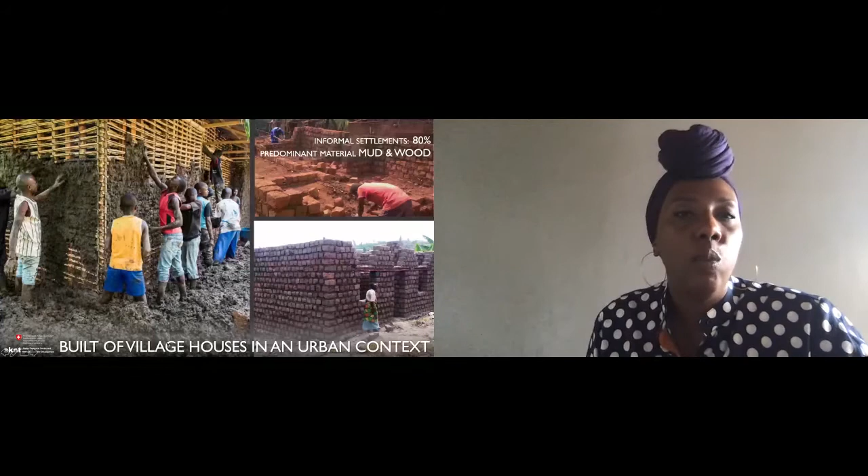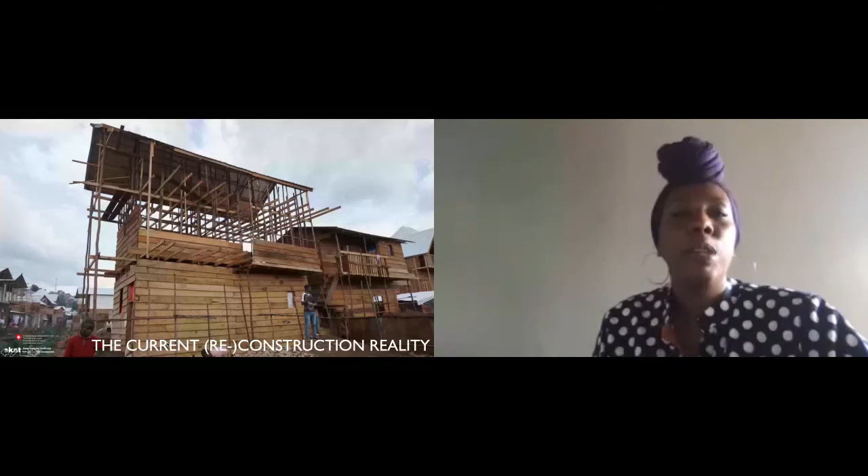And of course, there are always disasters, and especially now that the climate has changed, rainstorms are a lot more frequent, so there are storm damages to the houses, landslides, incredibly dangerous. In places like Bukavu, where they build primarily of wood, there are many frequent low-intensity disasters, several fires per year that wipe out hundreds of houses within minutes, and then people rebuild in the same areas. And this is the current reconstruction reality. So in many cases it's preferable to build preparing for the next disaster, not investing too much, because you know inevitably you have to replace the housing stock.

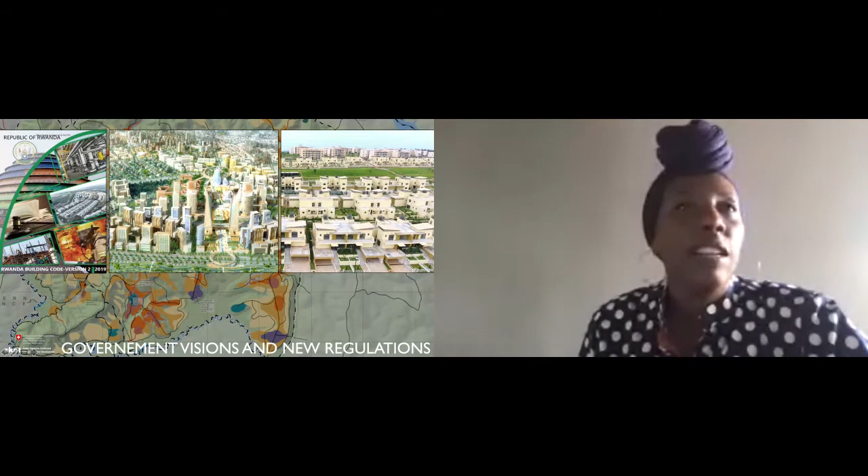And so what are the challenges that come with that? We now have this desire for vertical growth in African cities, especially here in Rwanda, where the government has gone to enormous lengths to publish proper building codes. There are upgrading codes, land use plans, a new master plan for Kigali, all of these new regulations so that the country, which will hopefully soon be a middle income country, can have housing and building stock that is fit for this type of activity. And housing and the median income are tightly related, because housing should be a major growth and employment factor within a developing country.

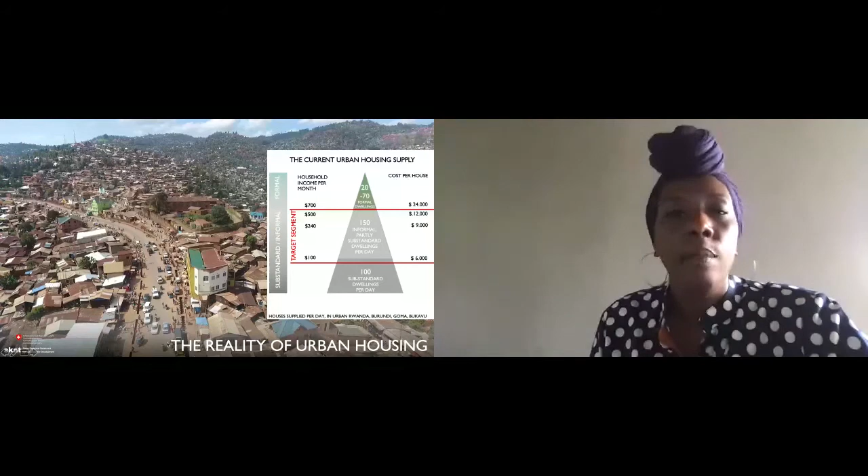Unfortunately, even though there are those ambitious master plans, the reality of urban housing is actually quite different. Currently, the formal housing supply is only at the top of the income pyramid. Everything at the bottom is either substandard or informal housing, and there are hundreds being built every day in the region using the materials that are locally available. The problem is that for urban buildings, there's a lack of skills. And so contractors struggle with building multi-story buildings. And this is an example of something that you see in Bukavu.

And then, of course, that creates extreme vulnerability in these places that are already sensitive, and for these populations that are already searching and needing proper housing solutions.

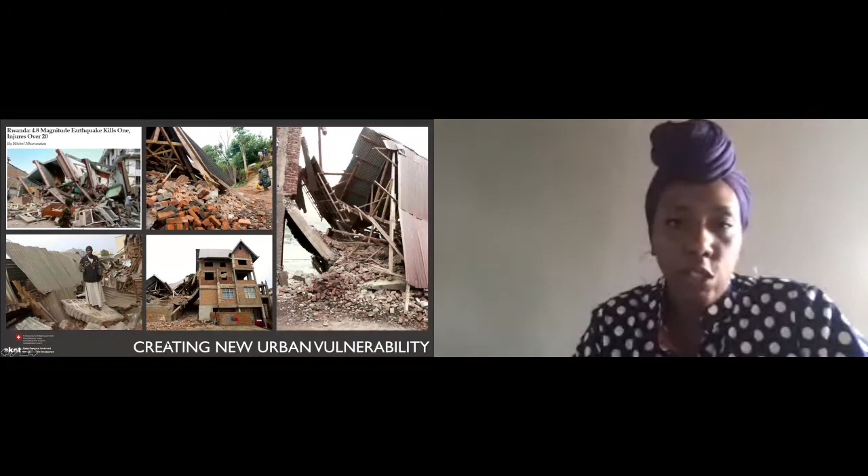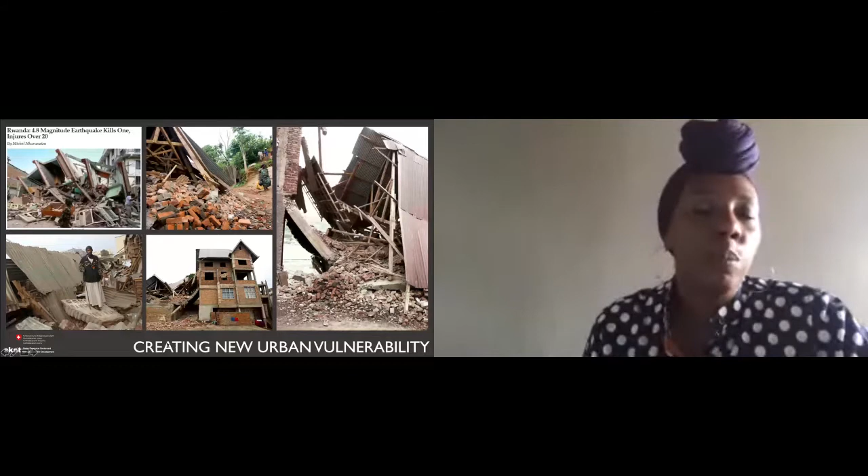On top of it, this growth in the cities is requiring more building materials. There are few local strong value chains here in the region, and so people mostly go outside searching for cement. And cement comes from some here in the country, in Rwanda, but mostly from our neighbors in Tanzania, in Kenya, Uganda. So all of that capital is actually going to the neighbors rather than staying here and actually nourishing and feeding what should be a strong construction industry, considering that the demand is so high.

In the region, in 2015 alone, there was $100 million that were sent outside of the country, which is equivalent to about 50,000 workers' income that could have been here if there had been other solutions for being able to build. And right now there are few.

And so what happens, of course, is that then we fall back on the traditional building material production that has been popular here for 50, 60 years, which is bricks, fired bricks. And those bricks require firewood, which, although in Rwanda it is completely illegal to use firewood for firing bricks, it is used because the need for building materials is so incredibly high.

So you end up in a situation where it's already an area where deforestation is a problem, and once the need for these bricks gets so high, and it is incredibly high right now post-COVID, the impact on the environment is felt on many levels. So at deforestation, but also when we talk about emissions and CO2 emissions.

So the objective of our project, which is called PROECCO, Promoting Off-Farm Employment Through the Production of Climate Responsive Building Materials, is to reduce the urbanization's climate impact. And it's also at the same time to tap into the unused employment potential. And you can do this, of course, by making safe urban housing affordable and available at mass scale.

This project has been around since 2012. It is a project of the Swiss Agency for Development and Cooperation. They have a long-standing collaboration with the Rwandan government and the Burundian government in the Great Lakes region. They've been here since the 60s. And so the commitment to being able to help build larger cities that can really help the community thrive is something that the Swiss Agency for Development and Cooperation has been committed to for quite some time.

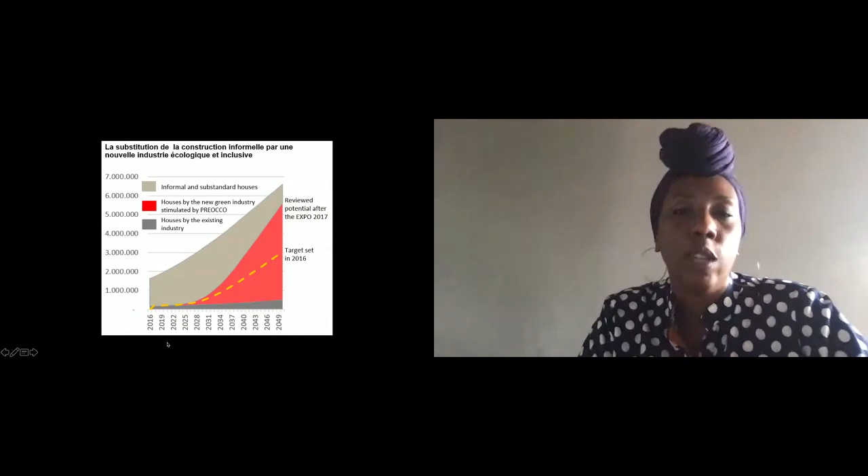And so if you actually start to look at the housing curve and to really understand what this potential is, you can see really that the need for housing is immense. The market share of informal and substandard housing is quite large. And so really the idea is to come and find solutions that can actually provide affordable housing to people and switch from informal to formal solutions. And we imagine that you could have at least 40% market share by producing locally sourced building materials, most specifically brick.

Now, what does that mean in terms of a real challenge by 2050, just so we understand the volumes that we're talking about and the type of solutions that we need to plan for? What it means is that you would need about 5 million proper formal urban dwellings by 2050. It would also mean that by not doing this, we could potentially lose 300,000 employments that are gone to the cement industry, which again is mostly outside of the country. So what can we do to figure out how to keep those employments here in the country?

And if we look at what it does to our environment, 100 million trees are unnecessarily cut by producing these substandard brick products that I showed earlier. And so the impact of that is about 40 million tons of CO2 that are unnecessarily emitted. If we could find a proper local solution, you could begin then to reduce the emissions, create employment, and then of course generate the dwellings that you actually need to meet the demand.

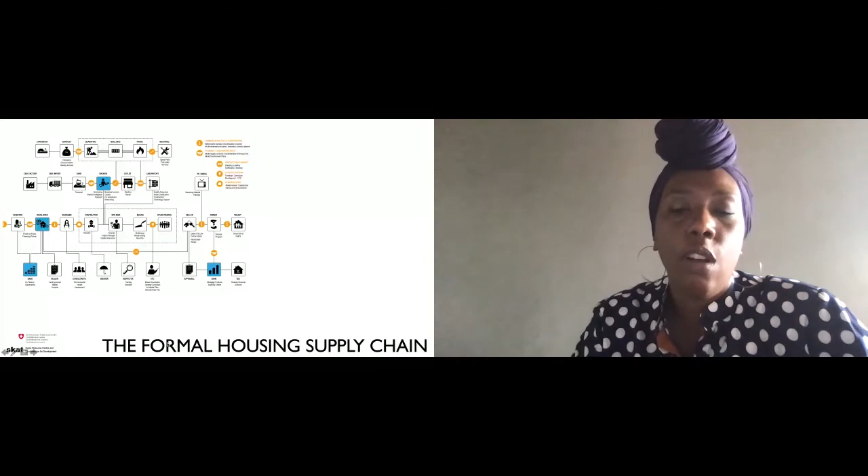And so our job is not to replace any of these actors, but to capacitate them, to allow them to perform at the level that they need to be able to deliver all of the housing that is required. Basically, we can then break the housing chain into different groups. So at one area, we come up with solutions that are aimed at figuring out better concept design and engineering, also supporting housing finance. The project also looks at construction solutions, inside client business, trade and quality certification, and building material production. So again, we're everywhere along the value chain.

Everywhere you see an orange dot, that's where we play the intermediary to try and create win-win solutions between different partners along the value chain, all with the idea to be able to build this so that it is strong and that it could allow the number of houses that we need to be created across the region. And so what does that look like?

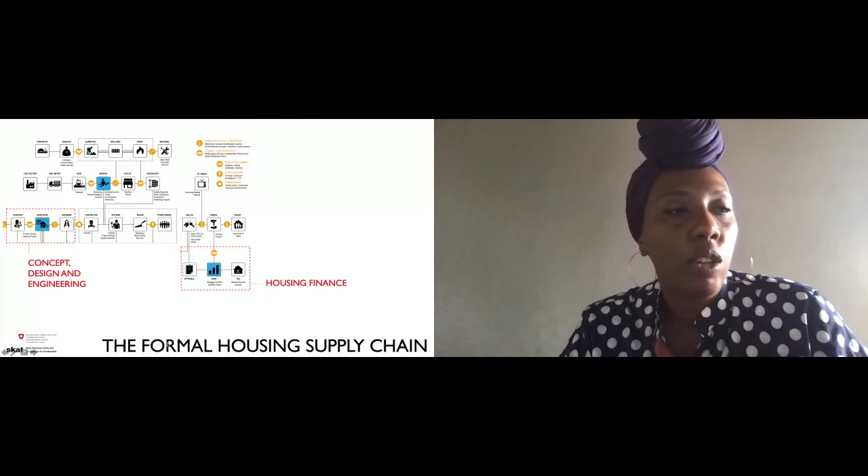So from the concept design and engineering perspective, that can be owner-driven settlement upgrading methods that draw from some of the legal documents that are already in place, especially here in Rwanda, affordable and green urban housing typologies, pre-engineered construction design solutions that can be available for people to be able to take those documents and actually be able to build with them. We also offer easy to build storied walls and slab solutions that are, again, available for the public, trainings for contractors and masons, quality management and inspection methods, all with the aim of course, reinforcing the strength of the construction sector.

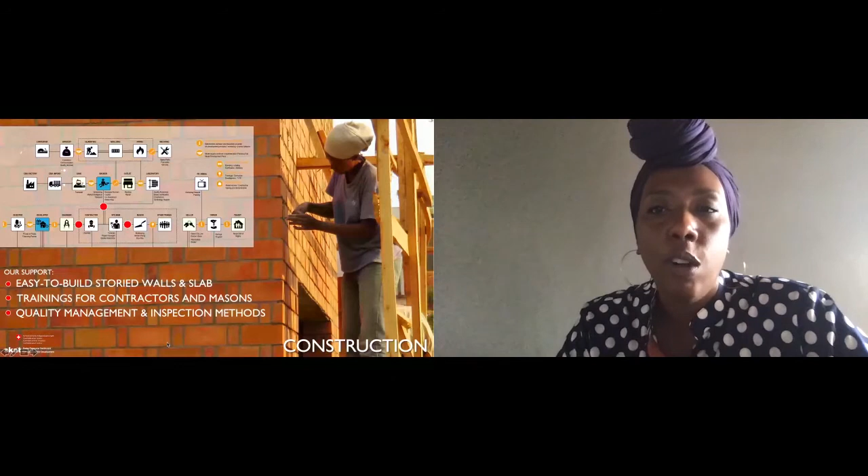Similarly, now the project offers low carbon technologies for load-bearing brick walls, machine designs for products that require less cement, and the coaching of brick makers and other building material suppliers along the value chain.

With that in mind, to give you an example of some of the tools, there are owner-driven settlement upgrading tools. We have on the left, as you can see, some cartoons, some typical plans of how you can begin to transform entire neighborhoods, and all these documents are available for local communities, for authorities, for investors, bankers, etc. We offer modular and customizable building systems that really allow us to create affordable housing that can be duplicated and customized according to people's needs, according to their budget, and of course, according to their preferences.

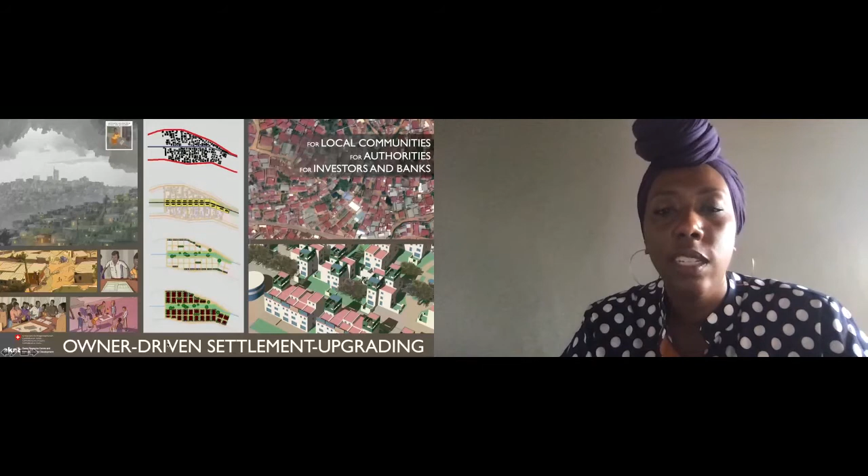Easy to build walling systems, as I mentioned, pre-engineered designs, and then of course, tools that allow local authorities, civil engineers, building inspectors, everybody to be able to use and learn how to use these technologies and apply them again at a larger scale. We have calculators and costs and climate performance calculators that allow you to see the different types of construction system and what would be the environmental benefits of each one.

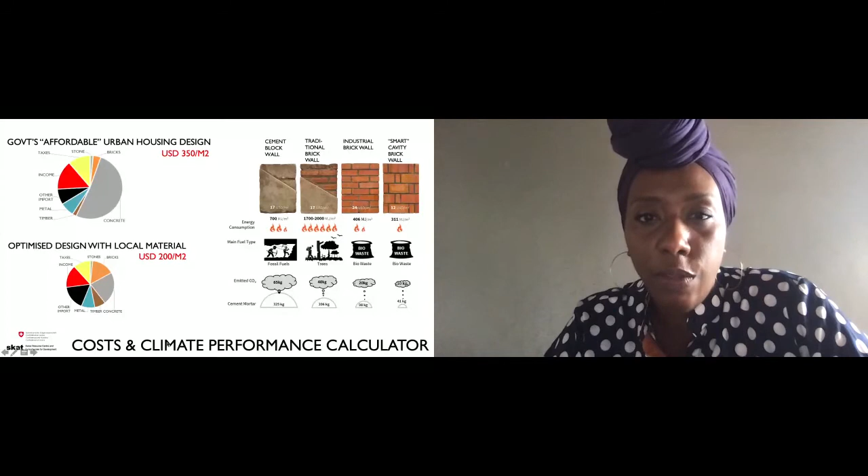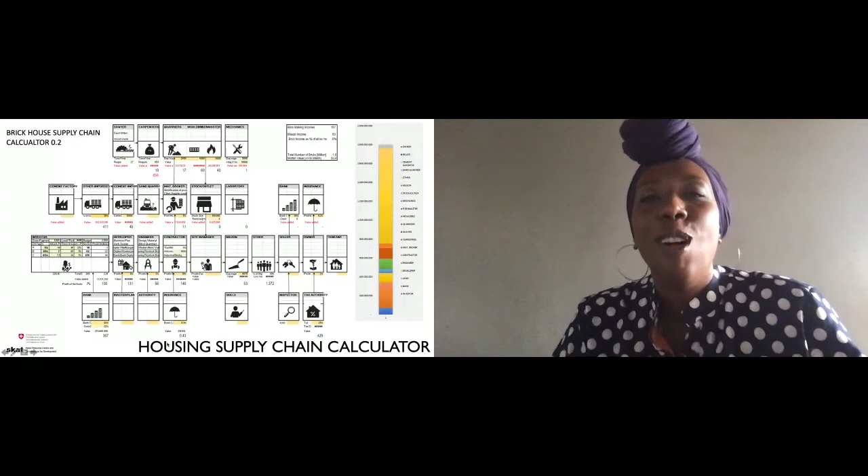Housing supply chain calculators to be able, again, to calculate what do you need in terms of how many engineers, how many architects, how many laboratories to test bricks, all of that to be able to build up the supply chain to deliver the housing. So given all of that, the project has been working on building that up for the past 7 years.

And what has been really exciting for us is that we've had the opportunity to do a proof of concept, to test it out, to see how it is working, what the reception is, and to fine tune all those tools so that when the project closes, they can be transferred to the private sector. And so we did this at 3 scales, and those are what I will describe to you today. The first scale is the scale of the house.

So what we did was to start looking again at this value chain to zoom in on really the construction aspect. And how could we come up with something, given the limited purchasing power, a module or a type of housing that was cost effective, that was customizable, and easy to build and replicable? And so in 2017, we introduced what we called the 8 million franc house, which at the time was a little less than $10,000. And so that includes everything, including taxes, contractor profit, everything except for the land.

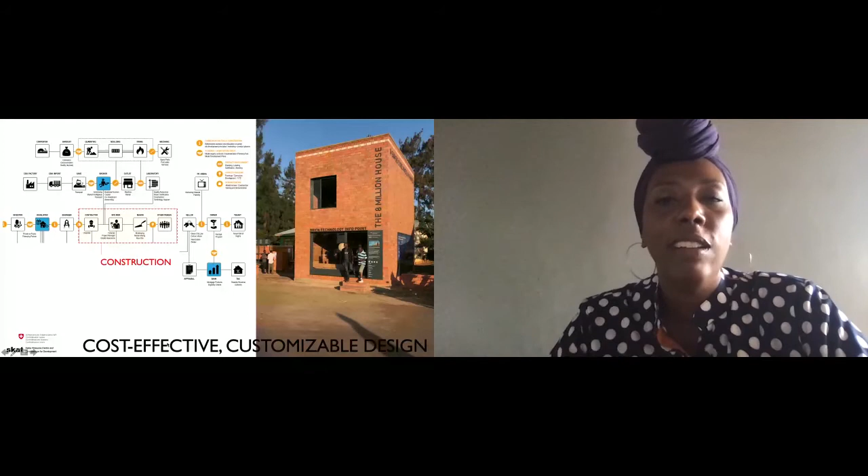And the idea was to show that you could build something with entirely local materials and really be able to achieve the cost savings that we need in order for the population to be able to access these houses.

So with the usual construction cost, we're about at $350 minimum per square meter here. With the way that we've chosen to build, with what we call a cost optimized design, and I will show you some of the features afterwards, we reduce the amount of cement mortar that is required by using a different technology, and that allows us really to shift to a design that is much more locally focused.

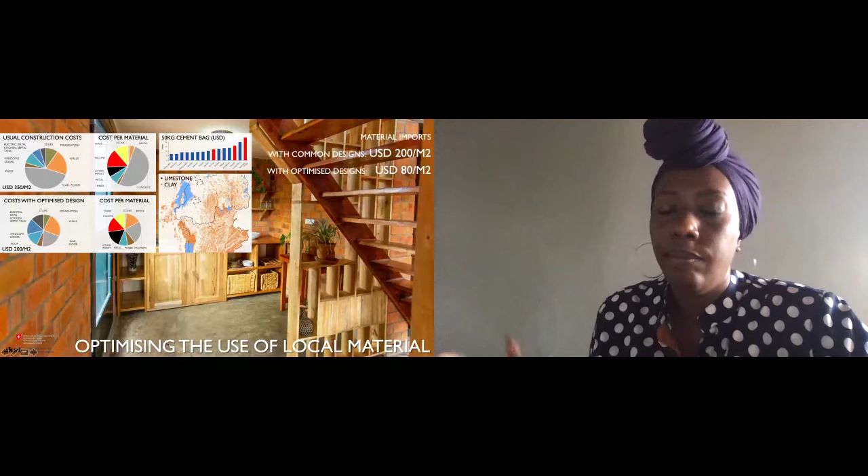So with a common design, you have about $200, which is actually material imports from outside. With this optimum design, you have about $80 of the cost per square meter that goes to the construction of the house. Now, in addition to the local materials, the other thing is the rowlock bond.

And so what we did was really look at what you can actually do with a typical brick. And we decided to reinvent or give a new life to something called the rowlock bond, which is a cavity wall technology. And this cavity wall is not something that we've invented. It's been around since the Industrial Revolution, but it's actually something that allows you to reinforce the wall so the wall becomes load bearing. So no longer do you have column and beam structures.

You actually have a wall that carries the loads from the roof all the way down to the foundation. And that means that everything inside can then become entirely flexible. And so it can be in that way incremental, that people can begin to put in walls and partitions as long as they have the finances to do so.

And this technology has actually been adopted and promoted very heavily in Kathmandu after the last earthquake, because that reinforcing of the wall allows it to perform quite well during seismic events. And so even this little first cube that we built, you can see all the reinforcement that's actually inside the building. You don't see columns, you don't see beams. What you see are these, what we call strengtheners, both horizontal and vertical, that allow the building to stay together and protect it in the case of an earthquake.

So in addition to that, using those technologies, you see that we're able to drive the walling cost down from $18 per square meter roughly to about $12 per square meter by, again, reducing the amount of cement mortar, coming with a better environmentally friendly improved brick product, which also creates more employment. So 2.5 person days per square meter as opposed to 1.5 person days, and also consumes much less energy because it is fired with bio waste and not the firewood that is technically banned.

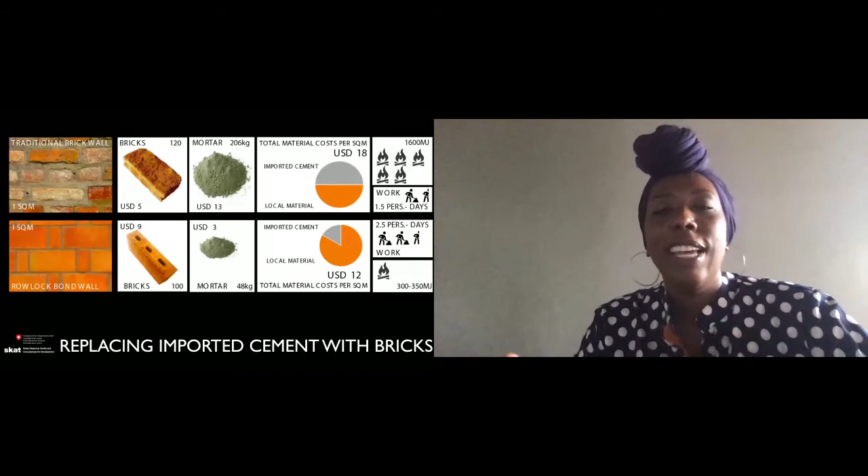So we started with the small one unit and then built an 8-in-1 unit in an informal settlement as a demonstration. And it is fully occupied, renters, tenants, as well as landowners live in this unit, and it's able to meet all the requirements of the master plan, as well as be there at the cost that was required.

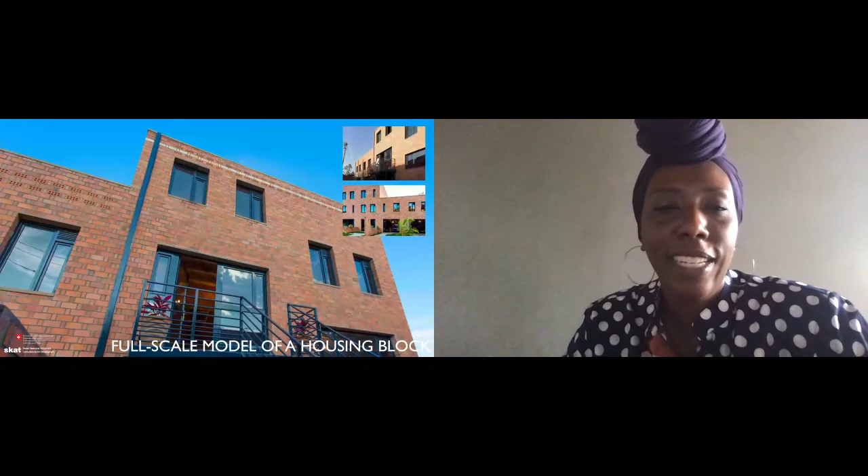Since we built that building in 2018, it has been duplicated across the region. In Rwanda, it's already been copied with this technology, different versions of it. There are about 1,500 copycat dwellings since 2018. The last time I saw you last year, it was about half that amount. So they continue to propagate all over the region, which is really quite exciting.

The issue is, of course, that now the building material demand becomes higher. So we've managed to generate jobs in construction and jobs in producing bricks, but the industry, of course, needs more. If we go back to the figures that I mentioned at the beginning, 5 million houses are going to be needed by 2050. There really needs to be a manufacturing engine to supply all of these bricks for all of these houses. And that really is also part and parcel of our job.

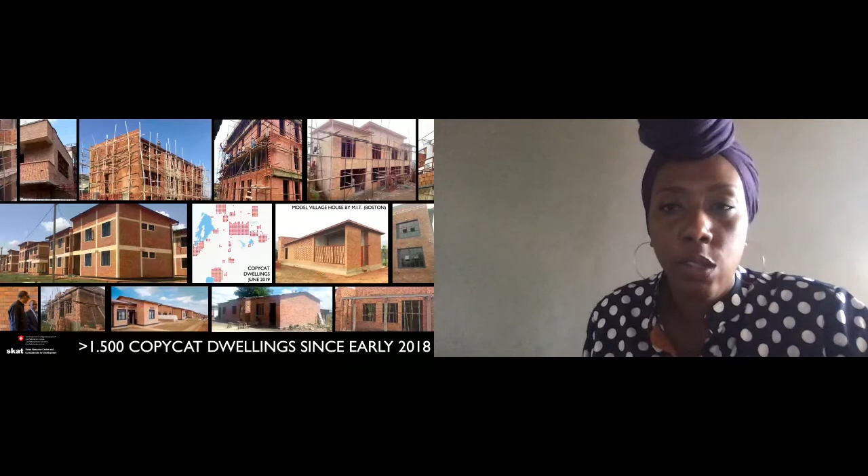The good news also, besides the fact that the house has been replicated many times, is that the city of Kigali, which has just launched its new master plan 2050, has designated a special zone, equivalent to about 32 square kilometers, for this model type of housing. So the Swiss Development and Cooperation's model houses now are able to be built in 32 square kilometers around the city, and soon we hope that it'll also be in the secondary cities.

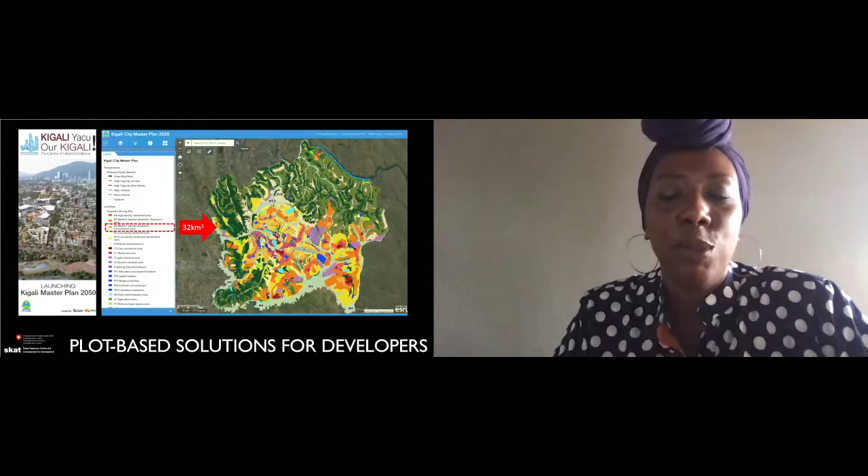Again, this creates an immense pressure for the building material producers, as well as an immense opportunity, because they should get organized now, and that's where we're supporting them to be able to deliver all of the bricks required for this. So given that we now have this massive interest, this massive demand, and a shortage, we then started to look at a slightly bigger scale, as we wait for the full industry transformation to occur. And that scale was the scale of the plot. We know that people are still building, and they still require bricks to build those buildings.

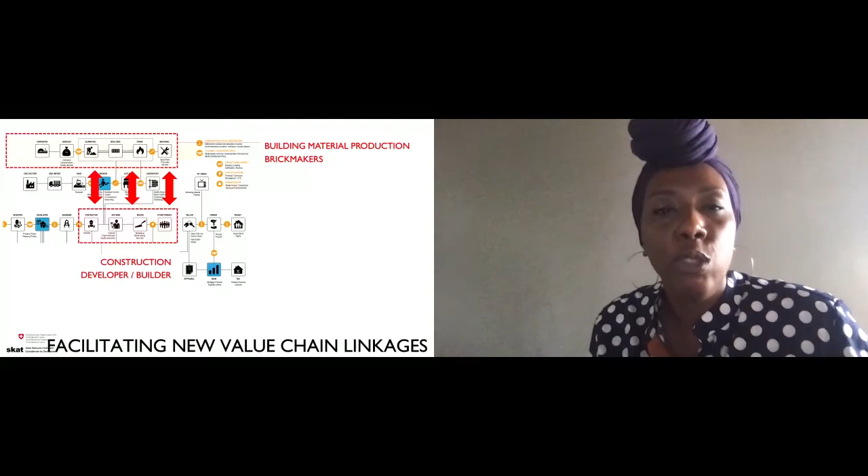And so what we did, going back to our value chain, was to look again at what win-win situations we can create between different actors. By bringing together the developer builder and the building material producers, we were able to facilitate a new mini value chain linkage that is able to supply bricks immediately to people who are building. I will show you an example of that.

So now that we have this master plan, which you see up on your left, that has R2, our first model building, that zone is now designated in the master plan. We also know that Kigali, in the small map that you see there, has an immense clay potentiality. So how can we marry the idea that the clay and raw material required for modern bricks is available in the city with the demand for bricks, and think about it at the plot scale in a way that can address those people who are looking to build today? So we came up with what we call a plot-based solution for developers.

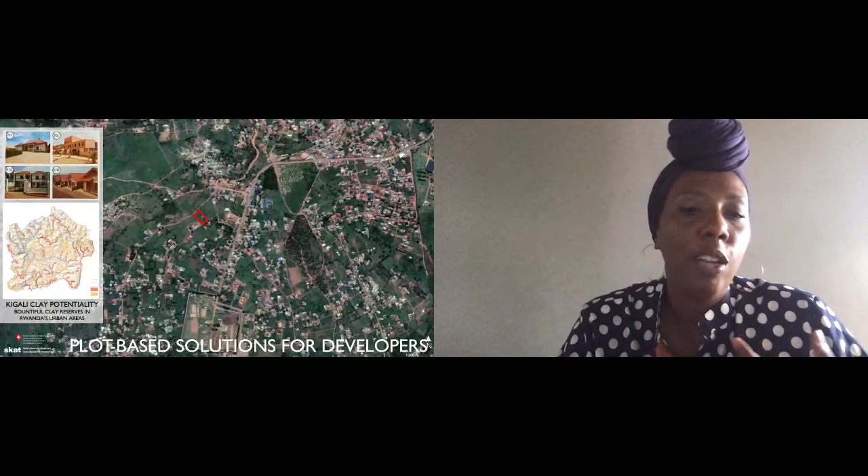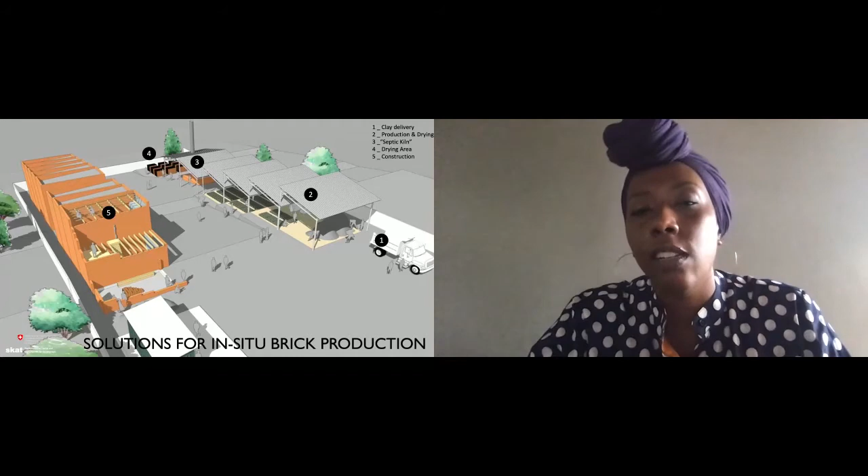And so there are now five of these sites running across the region. It's actually quite interesting for a developer because they can control the quality of their product. If they're not happy with the product, they can tell the mobile team to start again. At the same time, small producers who cannot invest in a big factory are able to create mobile production units and sell their services to a developer. So again, this is a win-win situation where we're able to get green products directly on the site. We don't have to pay additional transportation costs, and the buildings are built using the technologies promoted by the project.

If you see the image on the left, that is the septic kiln, which immediately, once we remove the hangar that's above it and the chimney, you can immediately connect to the buildings and be able to use it. So it's for the project. So it's already sized according to the needs of the project.

And what we found is it is incredibly facile to use. All the pieces, once the mobile team is done producing, the hangars, the machines, the chimney, everything is collapsible, and they can go then and produce on another site. And then the developer can, of course, sell or rent the units and develop another plot if they wish to. But really, it means that then people are busy.

Bricks are being produced, houses are being built, despite the fact that the industry itself at large is still in this process of transformation with larger kiln factories being built. But this matchmaking really allows us to be able to unblock some of the affordable housing bottlenecks that currently exist.

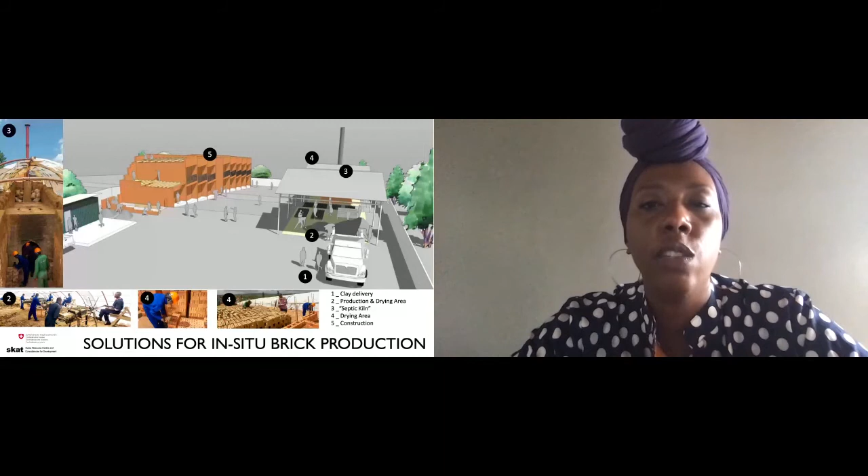Just to let you know a difference about price. So self-production of a brick on site is around $77 per thousand bricks. Now, if you were to buy these on the market today, they're minimum USD $110 per thousand bricks. And that, of course, is without transport. So really, there is a savings for the developer by putting this temporary solution on site.

The city has approved it in terms of being environment friendly, that the chimney is there, but there isn't smoke billowing out of it. As you can see, it's on the left-hand side of the picture, and they're able, most importantly, to get the units that they need onto the market immediately without delay. And of course, there is the aspect of quality control.

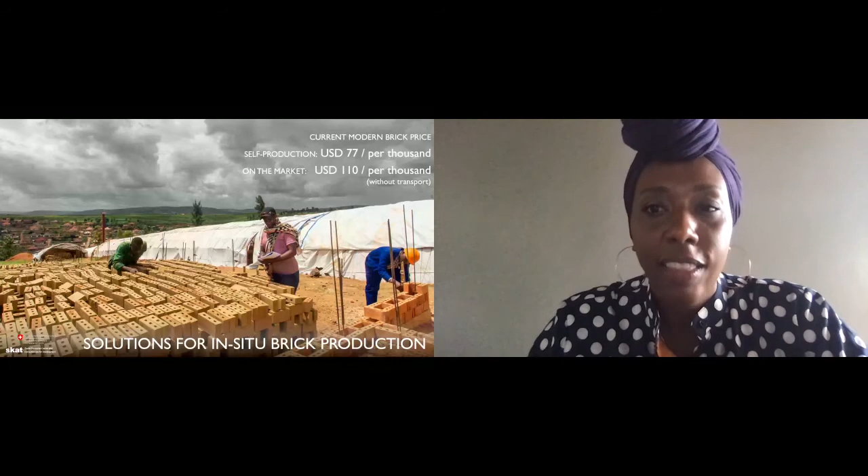So the third scale that we're looking at now is the scale of the neighborhood. How to be able to think about green transformation of neighborhoods using some of these technologies, creating employment, and at the same time, responding to the needs of the community. Our current site where we're working is a pilot zone that's actually not too far from the city center. So it really is a densely packed area.

Most people work in the service industry. It is a prime spot, a lot of singles who are renting during the week and head home maybe to the district on the weekend. And the idea is to try and pilot a rehousing project so that all of those people can actually remain in the neighborhood. It's not to transform the neighborhood and then chase them away with higher prices and accommodation that isn't suitable for their needs.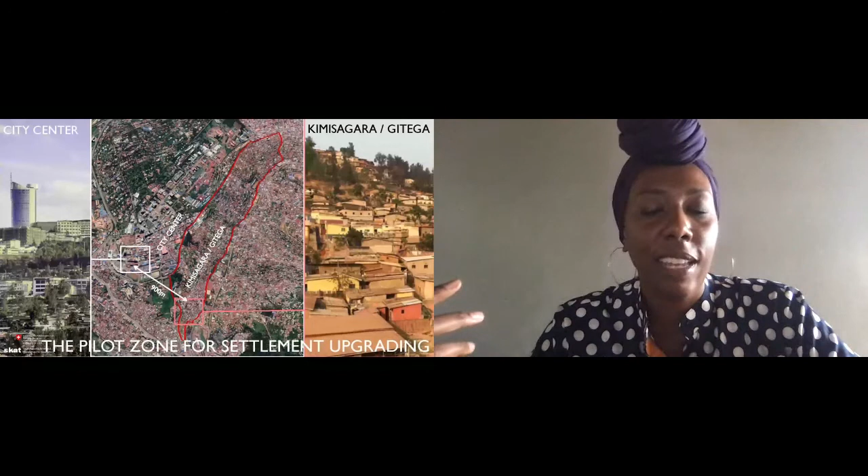In order to do that, we have to bridge this gap that exists between what the reality is and actually the vision that you see on the left of the master plan, and also those who make the decisions and the authorities, of how to actually be able to achieve this master plan vision. And we think that there are ways to do it, and that's actually what we're working on now. If you look at the area that we're working on now, it's some 450 households, about 1,000 dwellers are living there.

And so the idea is, how do you take all those people, understand what their needs and their preferences are, put in new buildings that they can afford, and really think about what a new neighborhood pattern should look like that allows them to have outdoor space, indoor space, and be able to build in such a way that we don't have the drainage and stormwater issues that we currently have in this type of neighborhood.

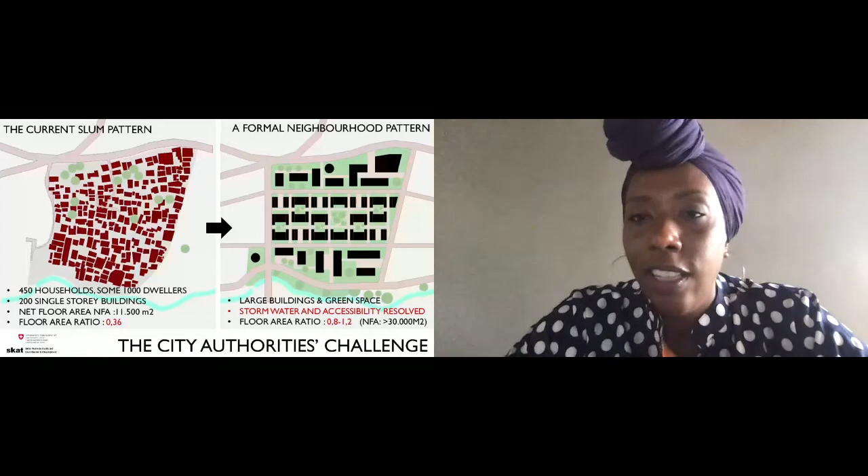The first thing we did was we set up a partnership with the University of Rwanda and the School of Architecture, and with the students, we did an exhaustive mapping, trying to understand what the existing typologies were at the site. Again, extremely important to match the needs of the people that are currently on the site with the solutions that are being proposed, with the technologies, how they can be adapted to best meet their needs.

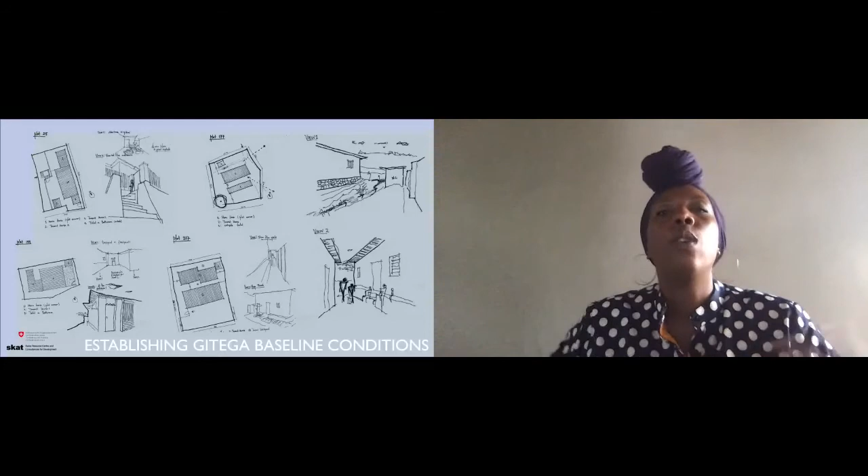And so from this survey, one of the types of information that we can glean, of course, is to assign an approximate value to what they currently have. So what is the value of their current structures, and how do we make sure in any type of upgrading project that those things are taken into account as we move forward and build other solutions.

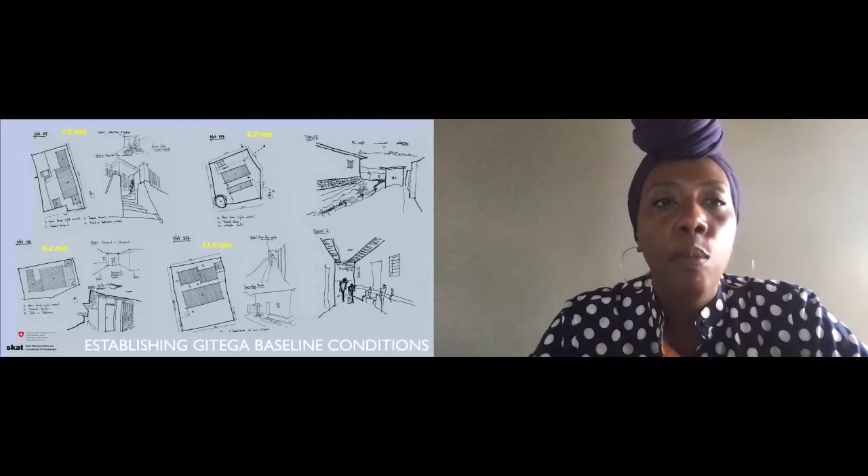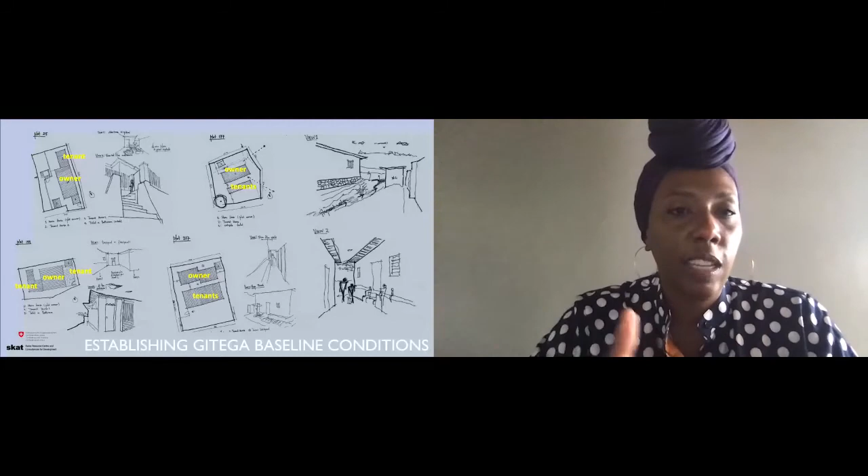But more importantly, going on the site, you're able to understand the relationship between tenants and owners, and the idea that there are multiple families living on many of these plots, and how do you not disturb those structures, especially because in many cases you'll find that the owner may not even live on the plot. For example, here in plot number 201, all of these units that are on the site are actually rental units.

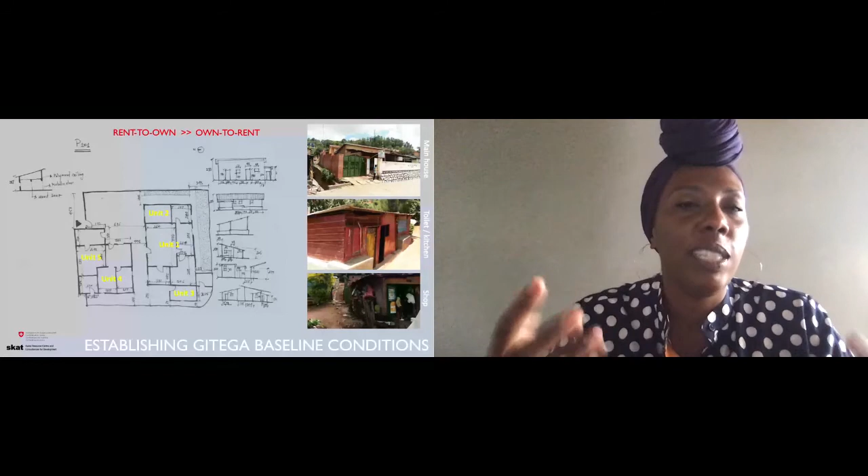And so you go from a logic that we typically hear of about housing of rent to own to an idea of own to rent. So everybody that owns a plot, part of the reason that they own it and they build these structures is so that they can get income from it. So it's really important to preserve and to respect that structure when thinking about how to redesign these neighborhoods in partnership with the community.

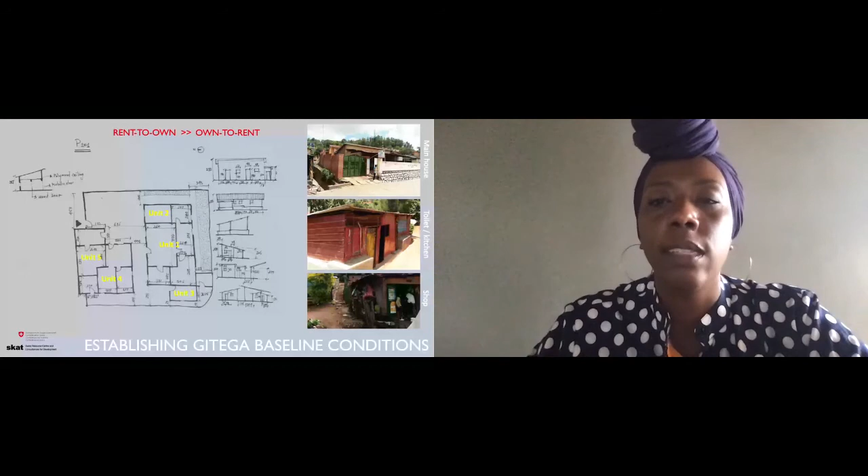And so by doing that mapping, we also did a socioeconomic survey. We were, of course, able to see what is currently existing, how many owners, how many tenants, how many 3 bedrooms, how many 2 bedrooms, et cetera, and to think about what the mix should be when you want to be able to plan a new settlement.

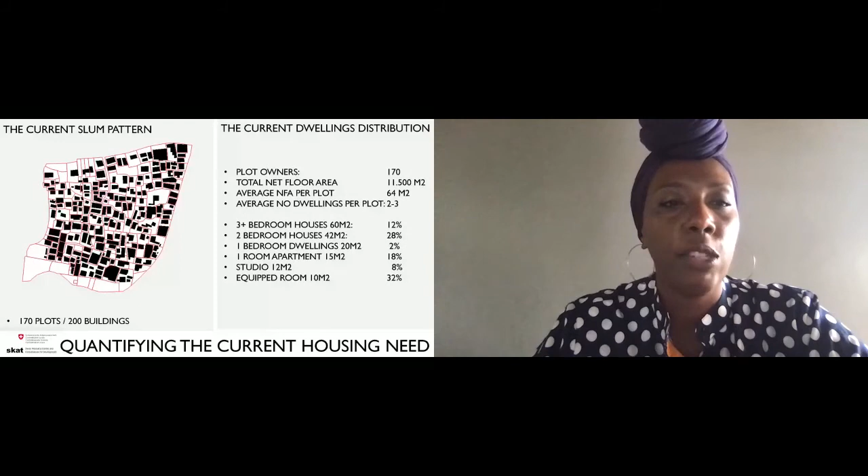But in addition, by doing the really architectural mapping and the socioeconomic survey, we dug deeper. What are the businesses? Tenants versus property owners. What are the toilet and kitchen facilities? What are the priorities for people? Do they prefer big windows over an outdoor toilet? How are they managing the stormwater on their plot? How are their utilities managed? What is the issue with garbage collection? And all that now needs to figure in and lay over the technological solutions that we have.

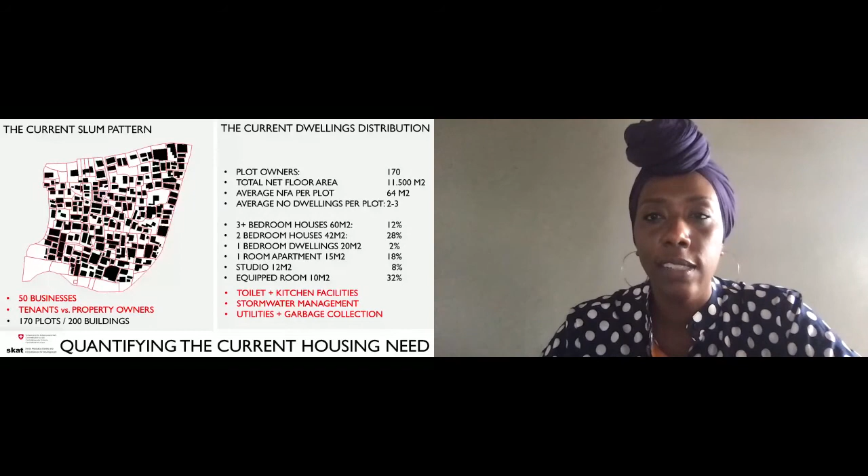And so we've been working with UN Habitat as well to be able to run this process. And this then allows us to go back, once we have all those ideas and answers about the preferences and focus groups responding to certain prompts, we can come back to our catalog, which is one of the tools that the project offers, this catalog of pre-engineered designs, and use that as a base for people to be able to figure out, what is it that I actually want?

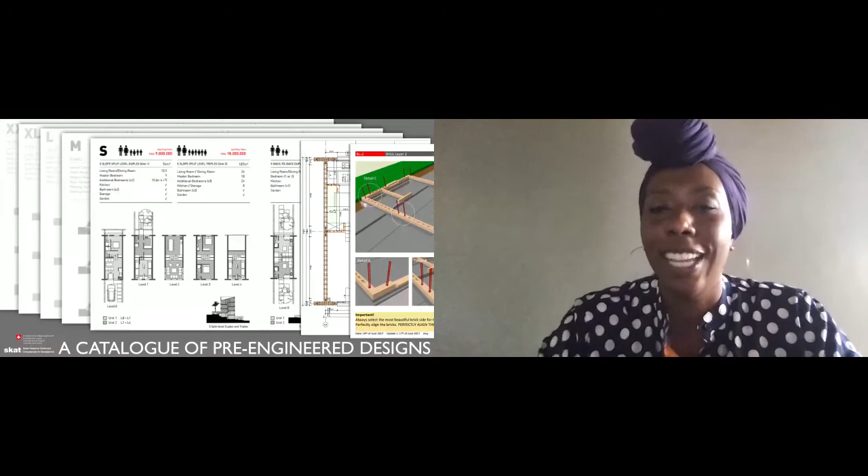Do I need to maintain my tenant income? Do I really need a 3-bedroom, 4-bedroom because I have, let's say, 2 families actually living together? What are the options to begin to discuss? And so this catalog of solutions, actually, we organized it like t-shirts, so small, medium, large, extra large, and XXL. And everything is in there to form the basis to be able to have a discussion with the community.

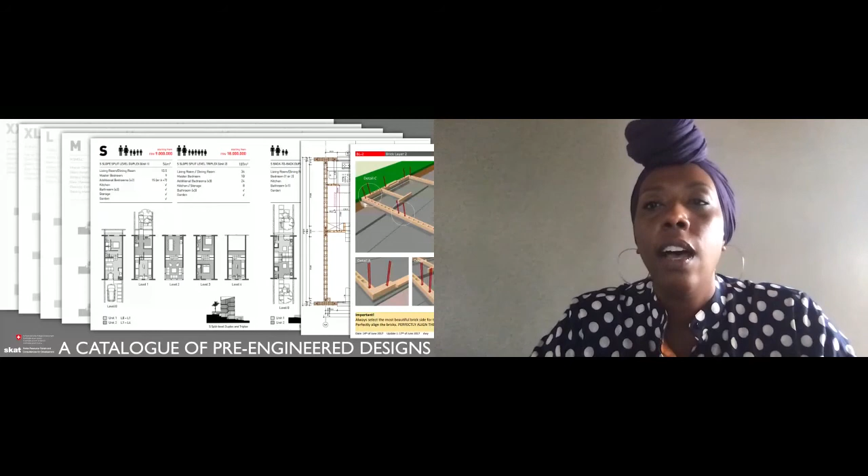And again, that discussion is extremely technical because it is based on a construction system, but it also is based on all of the aspects that make up their habits and their preferences when it comes to housing. And so the block typologies that we're looking at now to be able to replace the density that is there are a lot more dense. So we're calling them micro real estates. And the idea, of course, is that these are not individually owned. We're now talking about communal ownership. And that's also something that is quite rich and quite complex and needs to be planned out properly.

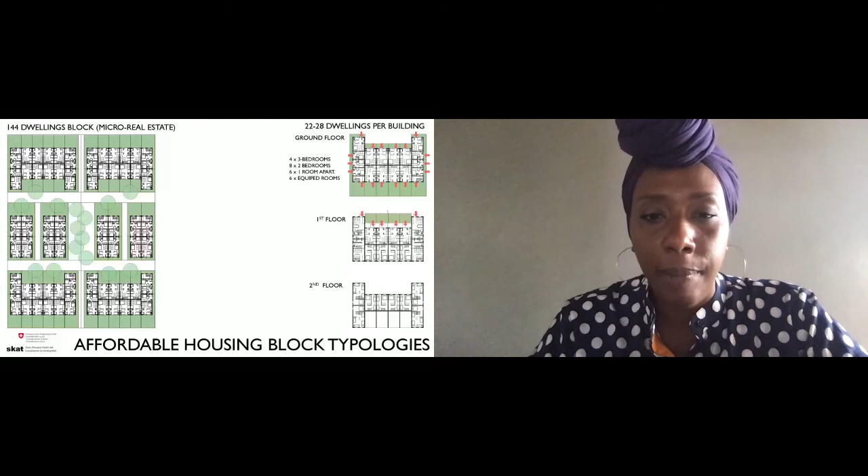And when you plan micro real estates, you need to plan for the building, but you also need to plan for the management afterwards. So should there be a small community fund to be able to do the upkeep afterwards? Should there be vouchers to support with now formal plumbing and utility bills, which they might not have had previously? How do they come together to share space in these new buildings while still maintaining the preferences that they had at the beginning?

The other tool that we're able to use is this calculation tool that we have for upgrading costs, because the idea, of course, is if you're going to do this at the scale of the city, and that's what our job is, to figure out how to upscale these types of solutions, the idea is to figure out how this can pay for itself.

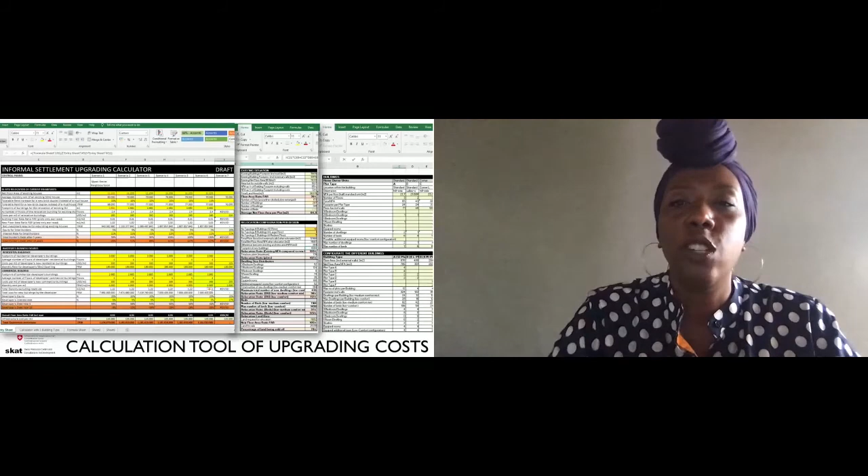And this idea is that if you build now a storied urban building that meets the requirements of the master plan, so we're talking 2 to 3 stories, not more, using the affordable technologies that we are working with, you should be able to sell other portions of your land. And that land that's being sold, consolidated and sold, should finance the construction that is happening. And so the construction cost minus the value of the sellable land should in theory allow for the affordable upgrading costs required for people to be able to self-finance an improvement in their homes.

We picked the strip precisely that goes up the hill, even though it will pose some challenges in terms of construction, but it also poses incredible opportunities to be able to show how this cross-financing can work, and all the legal tools that are required to be able to make this happen and happen later on at scale.

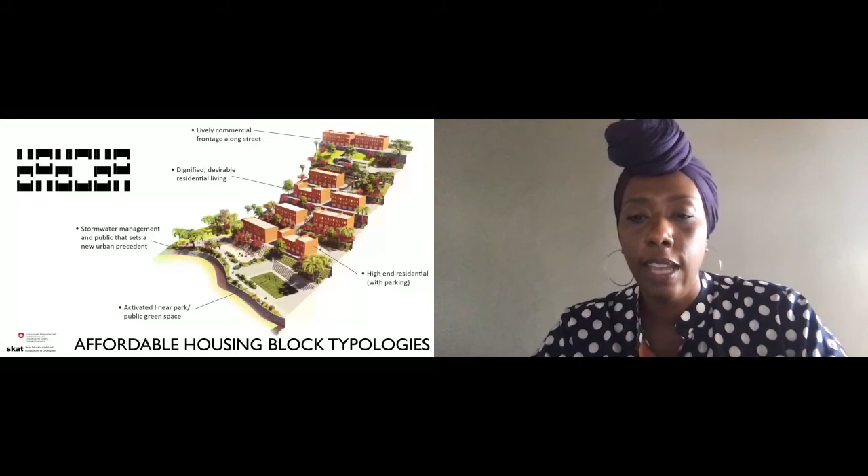And so if we just start to do quick calculations based on the current value of the land in this area, which again is high value because it's so centrally located, the construction costs that we're able to get, the $200 to $250 per square meter, the number of bricks that it would require, the number of jobs that it creates, et cetera, we're able to come with a net investment required of $1 million, which is exactly the budget of the city in this first exercise. And then you see what the average investment is per plot, looking at the interest rates and other projects and opportunities that are currently available in Rwanda.

We will be able to pilot this as a first model for a self-financed upgrading of a neighborhood here in Rwanda, using all of the green materials in a way that builds the value chain. We will of course be supporting the city of Kigali to set up the production facilities that can feed these types of projects directly. So there would be again this growth of the production capacity and the supply capacity to meet finally the demand capacity that is quite high.

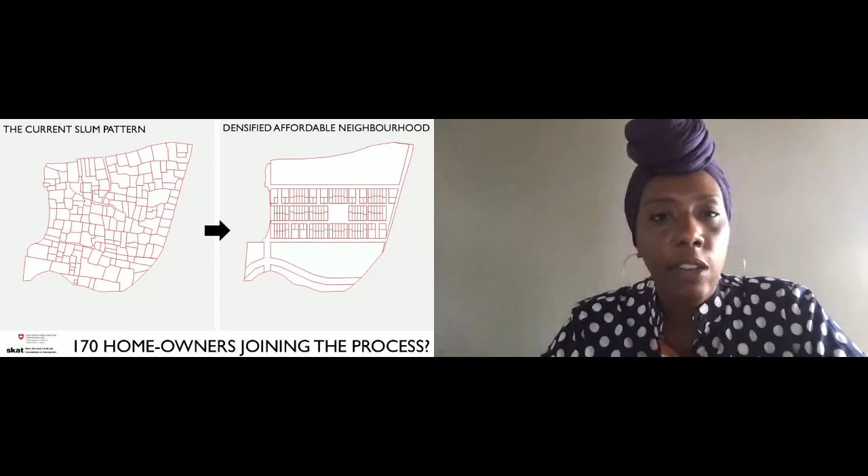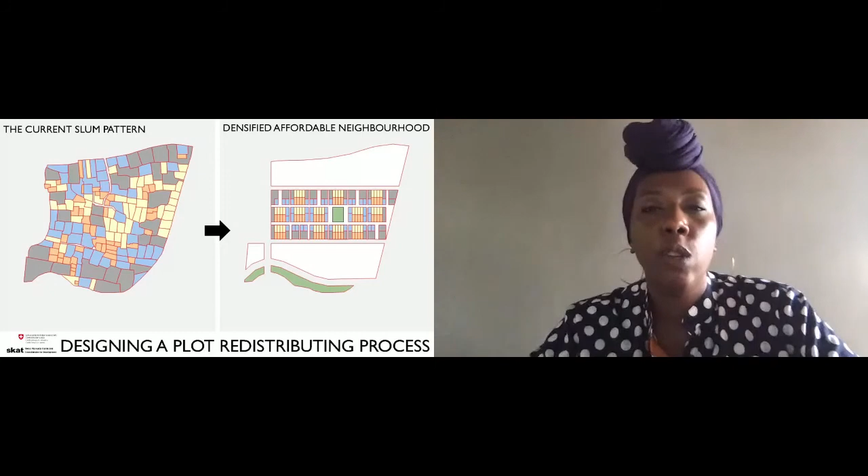And just to end, an idea of how you would begin to think about how to allocate the units and how to get people to actually join in on the process, because it should be a participatory process and people should feel that their needs and desires are, of course, respected. And so putting them together based on looking at what they currently have, what their new needs are, and then of course having them be organized possibly in these cooperatives.

And so there would be two levels of cooperatives. One cooperative at the level of a building, which will allow you to meet the condominium law, and a cooperative at the level of the strip that is the self-financeable module that you need of about 30 plots minimum to be able to make the math work so that you could cross-finance the development.

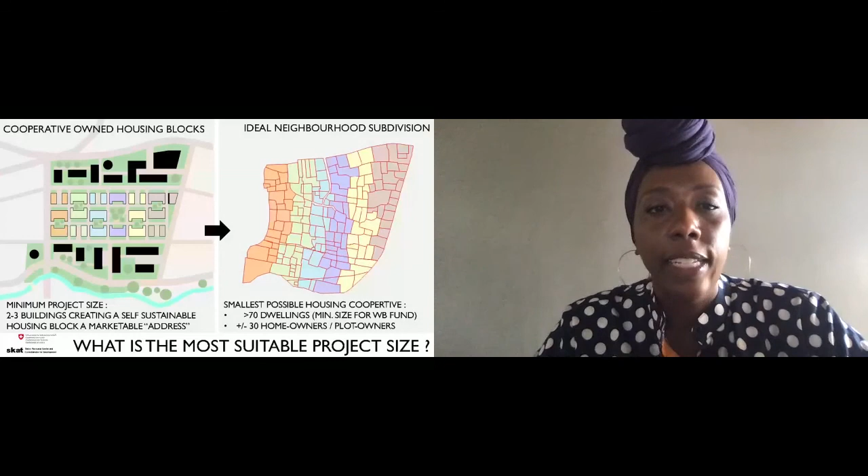And if we look again at the scale of this entire neighborhood, which is again right below the city center, the pilot neighborhood would require about 6 cooperatives that we would create in order to have this happen. 200 cooperatives would be needed for the entire area, and for the entire informal zone of Kimisagara, so both sides of the hill, for those of you that know the area, would be about 700 cooperatives. They would each be working and supported by the tools that are offered by the project to be able to access the green materials that are needed, and also the model plans and all of the discussion guides that would allow them to facilitate their transformation. And this, of course, at the scale of the city.